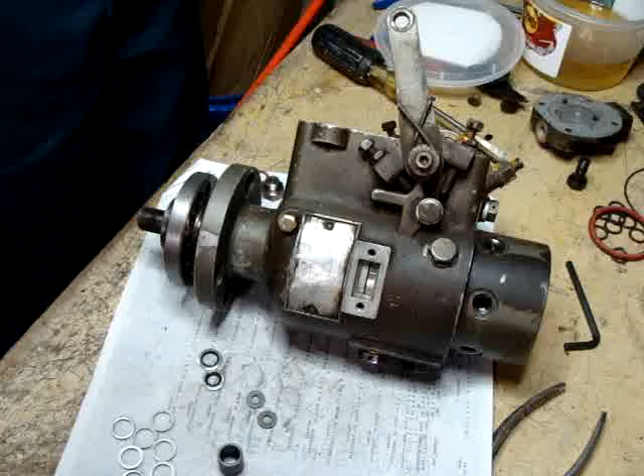Well, looks like I did it again. Missed something. Was working and came across this little sleeve on the bench and started to think, hey, wait a minute, where's that go? And sure enough, it actually goes right here on the shaft. This is supposed to be in here like this. And what this sleeve does is this sleeve keeps this part from being able to do what it's doing right there and try and move over that way. So

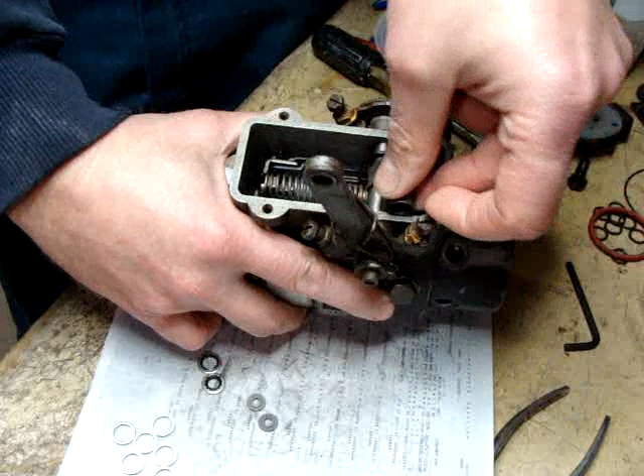unfortunately, I've got to take this shaft out to put this sleeve on, and to do that I've got to take off my little shutoff cam clip here. Oh well, nobody's perfect. Okay, I've got that sleeve in where it should be. That was easy.

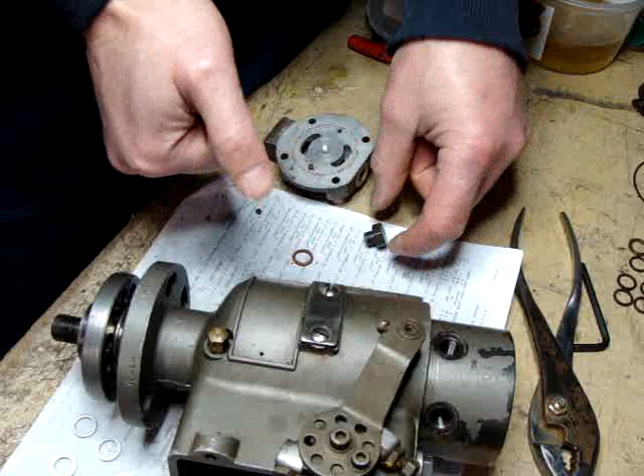Alright, since I've got it sitting right here on the bench, I'm going to sort out this bottom plug issue here. This is the O-ring, the original O-ring that came off, and this is the original plug, and the kit came with this new plug. Let's search in the kit for this size O-ring.

Well, this is the only large O-ring left in the kit that's the same color as that one, but it's too small, so that ain't it. And then I found this O-ring in the kit. It's a different color, but it's a better match size-wise, so I think I'm going to go with that. But I'm going to check the parts list and see if it's supposed to be an O-ring or if it's supposed to be a washer.

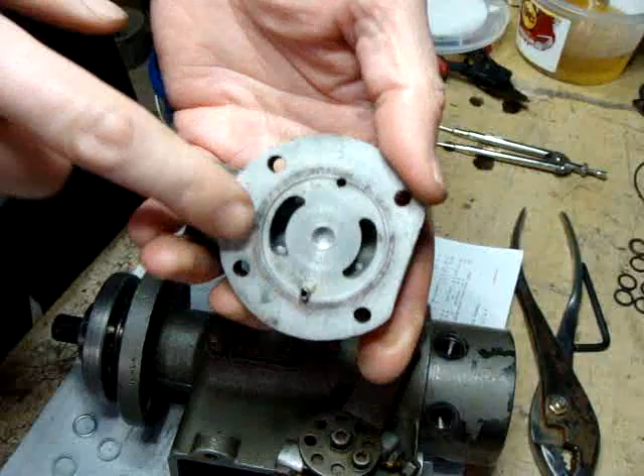Alright, now there's some residue on here from the old O-ring, and also on here from the large O-ring, and I want to clean that up before I reassemble this. Alright, so that's what it looks like cleaned up. Couldn't get all of this off of here, but cleaned it up quite a bit. Just going to put a tiny bit of lubricating fluid on that O-ring so that as I tighten it, it doesn't damage the O-ring too badly.

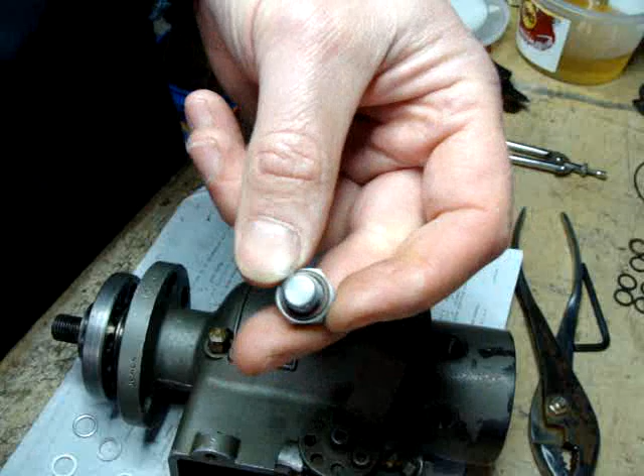Now the torque spec says the end plate bottom plug, which would be this, gets torqued 30 foot-pounds, but it's got that asterisk on it again. So I'm going to take away the, what was it, 30%? Forgot how much it was. Yeah, it was 30%, so I'm going to torque this to 21 foot-pounds. Oh, that's quite a bit of torque for such a little plug. So I got to mount it on my little workbench here again.

Well, that's crazy tight. I am not torquing it any more than that. I can tell that I've got that really tight. If I try and put 21 foot-pounds of torque onto this thing, I'll tell you what, I'll end up stripping those threads right out of that aluminum.

Now on the parts list, it actually shows this as a plug, a threaded plug that threads up inside there. So maybe that's the difference. Maybe that's what makes it different, I don't know. All I know is I've got that really tight with an O-ring in there. I have no reason to believe that's going to leak.

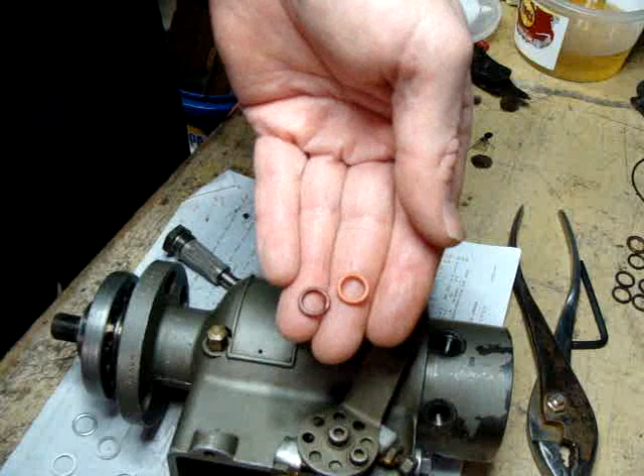Next thing I think I'm going to do is I'm going to remove the two original O-rings on this little screen assembly, and figure out which ones in the kit are the correct size to replace these two. Here's my two originals. Well, looks like a close match right there. And this one is a perfect match for the larger black original one.

This is some sort of a regulating unit because it's spring-loaded. If I put the point in here, I can actually push in this end of this valve, and there's a spring inside there. To get all of those guts out, I've got to take out that set screw down in there, which I'll do. Alright, now I'm going to open up that little check valve assembly inside this here. This is, I believe, a fuel regulating assembly.

On the pump version that I have some documentation for, they show that that's actually almost like in a separate channel on the side of the end cap. So in other words, on my end cap, my check valve assembly is actually in with the inlet screen, all in one part of the housing, the end cap.

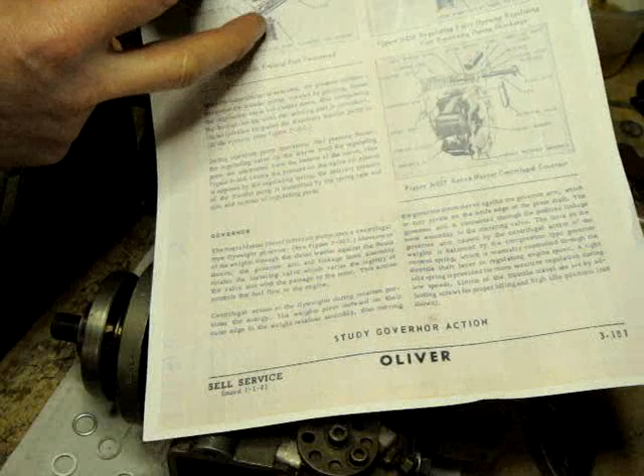On this version, you can see the inlet screen here. You can see the port on the bottom that I put that plug in. This plug, by the way, is a plug you can take out and hook up a gauge to test your transfer pump pressure.

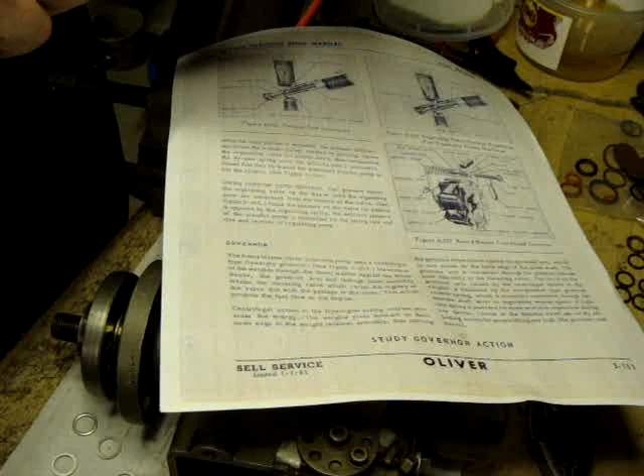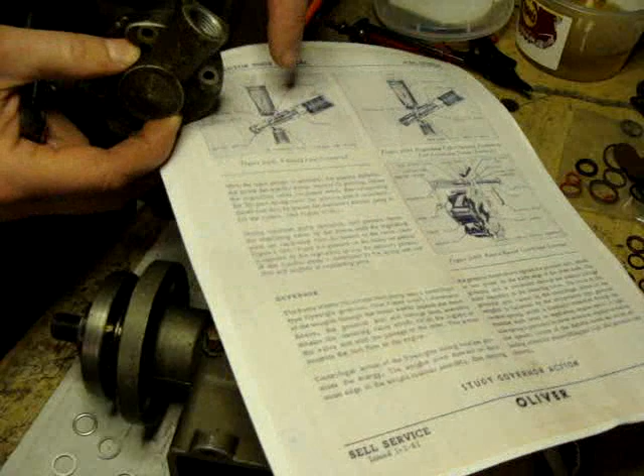But anyways, you can see this actually has a separate section of the end cap here that came in at an angle, and it shows the little spring and little check valve, and they're calling this the regulating valve assembly. So I think this is for fuel pressure regulation on the inlet side. So that's why I want to take that apart.

So it's a hex drive, and just gonna put that in there. Broke this ratchet, haven't gotten around to replacing it.

Alright, crack this just enough. Turn it with my fingers now. So now, before it completely comes out, I'm going to take it out of my vise here. There is a spring in there, so I want to be careful, make sure nothing goes flying. Don't know how much tension there is on that spring. Apparently not much at all.

There's the little plug. And then the spring, and then the little piston. And that appears to be all that's in there. It doesn't look like there's any seals or anything inside there that I need to be concerned about. So I'll give that a good cleaning and then just reassemble it.

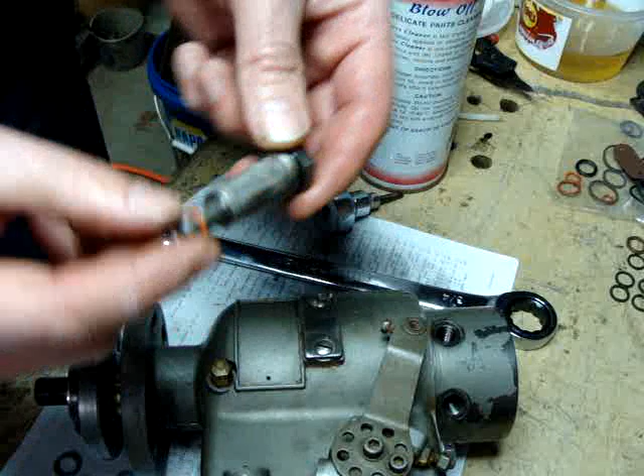And now that I've taken it out, I don't know what it was set at before. I think I may have fouled things up here. So since this is a pressure regulator, I'm thinking that this might be an adjustment that has to be made after the pump is maybe installed and running, and I have a pressure gauge on the output port. I don't know. I'll see if I could find anything in the literature on that.

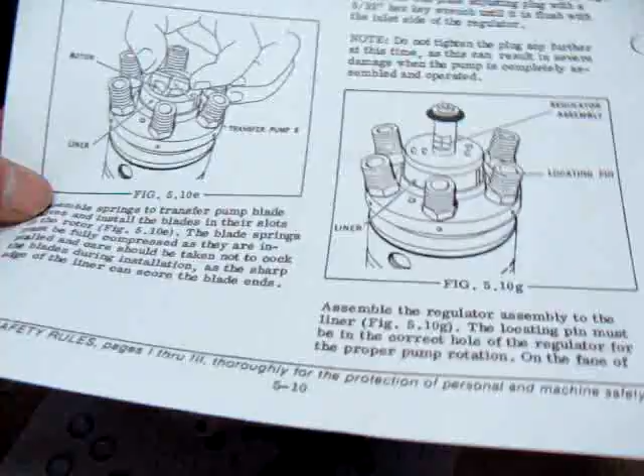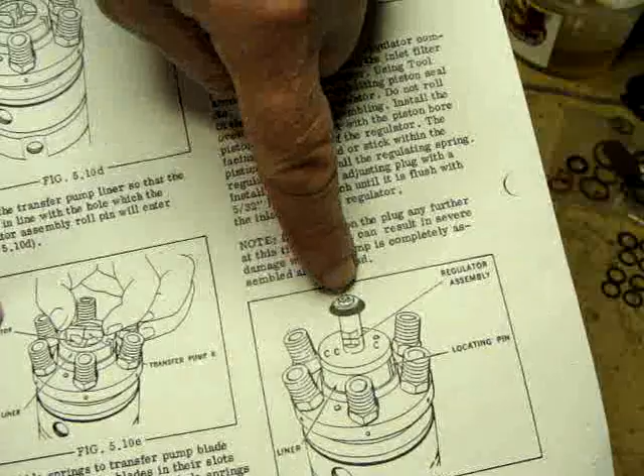Well, I did find some information out, not about this exact regulator assembly, but about the other style regulator assembly, if I can find a picture of it for you. Okay, so on the later styles of pumps that have the high pressure output nozzles coming out of the back there, the regulator is actually this assembly here, and there's that adjustment. Here's the breakdown of it right here. So you can see there's the plunger, there's the spring, and there's the little plug.

And what this says is, when you're installing that, install the piston to the regulator with the piston bore facing the inlet end of the regulator. The piston should not bind or stick within the regulator bore. Install the regulating spring. Install the end plate adjusting plug with a 5/32" hex key wrench until it is flush with the inlet side of the regulator.

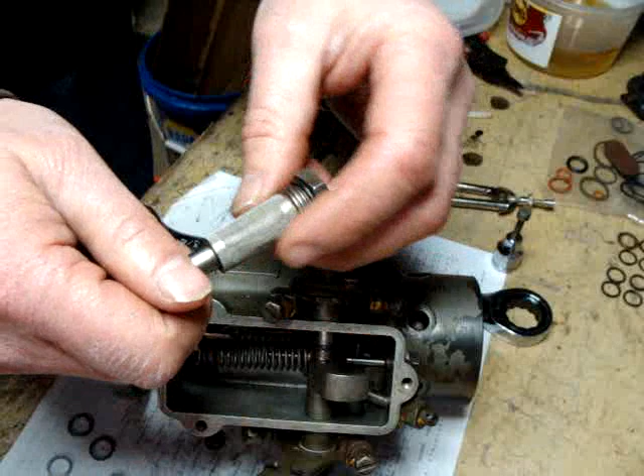So I think it's not necessarily that that plug gets installed to a certain tension or adjustment. I think it's actually just supposed to be installed until it's flush with some point. This is all just theoretical at this point, but I don't really have anything else to go on. So I think what I want to do is, I want to get this screen off, which is easier said than done. I certainly don't want to damage the screen.

The screen is not attached up at the top here. You can actually wiggle it. It's tight on this bottom part, but I'm thinking that if I can slide it down this way, it might pop off, because it's a tapered screen. You can actually see it's wider at the top here than at the bottom. So I think, again, if I push it off that way, it'll slide right off. That's the theory, anyways.

Yeah, I could definitely see some debris down behind that screen, and I'll tell you what it is. I noticed that when I was cleaning this fitting, there was a lot of hardened, almost like pipe dope or some sort of pipe sealant. You can still see the remnants of a little bit there in the threads. I cleaned most of it out, but that had hardened, and chunks of that have been falling into there, and the only thing keeping them from getting into the pump is this screen, and they are now trapped in that area behind the screen.

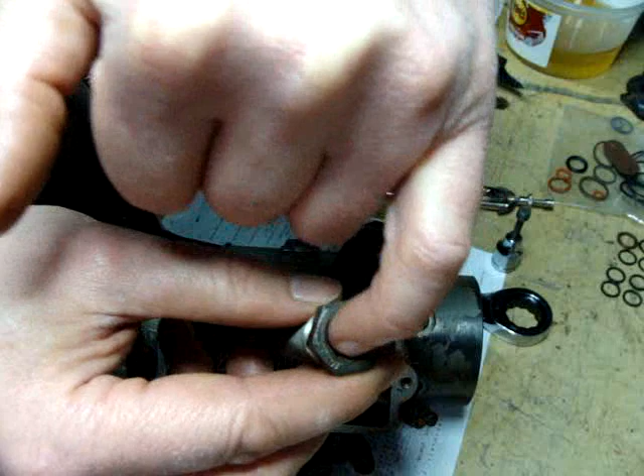But let that be a lesson. I certainly don't want to use any kind of pipe dope or sealant on these threads. If I want to seal it, well, I guess I could use a Teflon based one, or a Teflon tape, and I also want to make sure I keep it off of the threads that are going to be exposed on the inside.